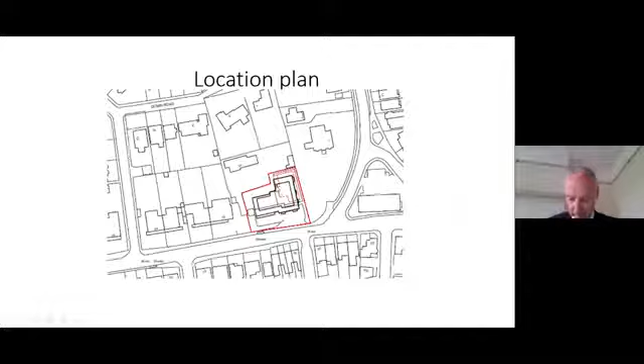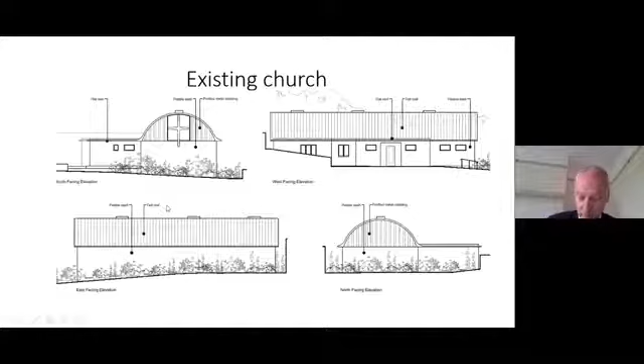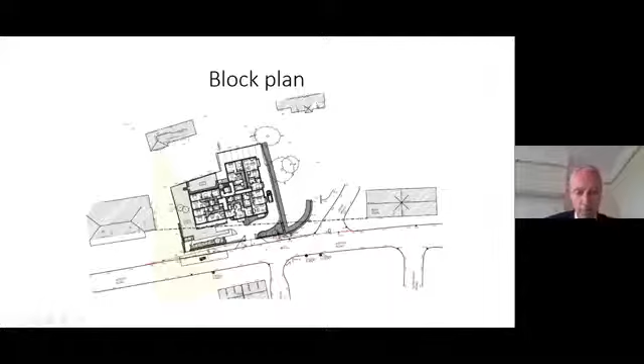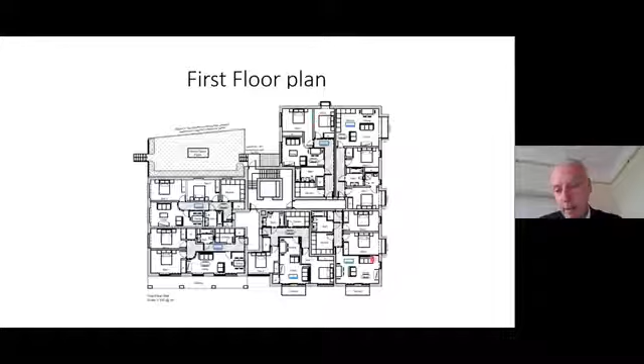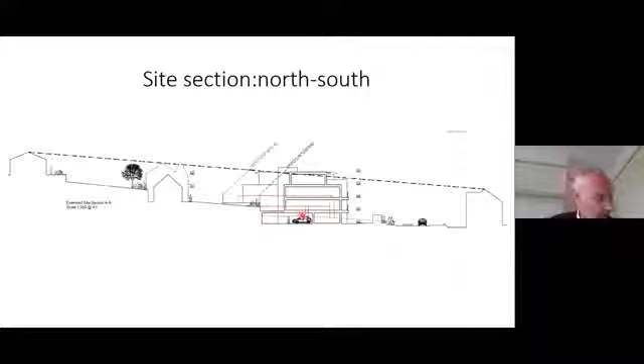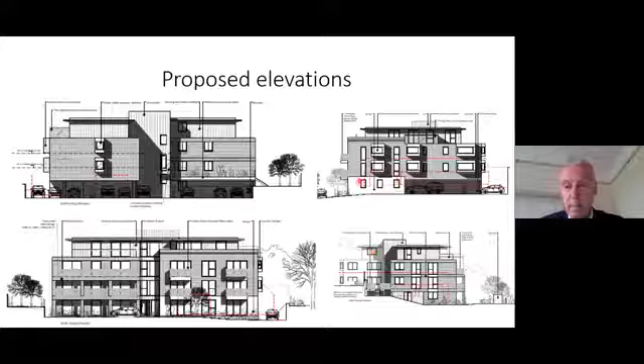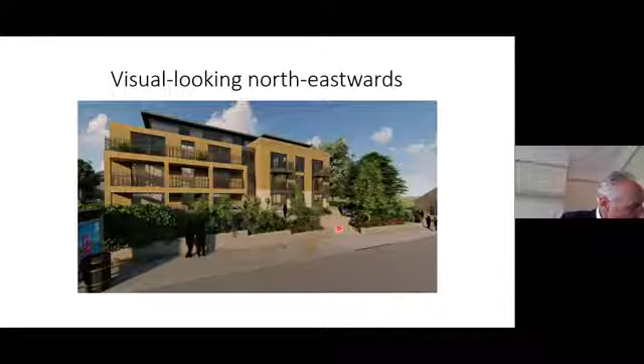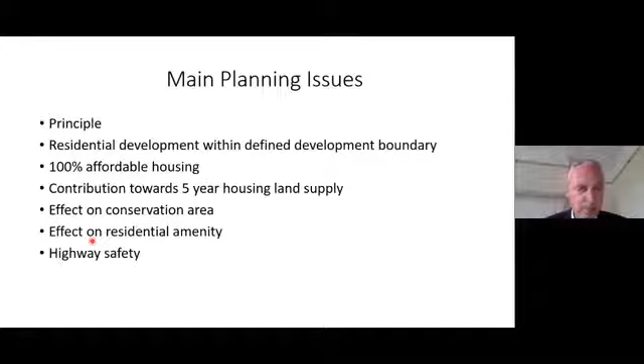So moving on to my recommendation, I'm recommending you delegate approval subject to conditions and to a Section 106 to ensure the units are used for affordable housing.

So the conditions, fairly standard type to start with, and then wall and roof materials - obviously it's important we get wall materials that are a particularly good match, similar to the Victorian villas on the west side. Window details, surface water drainage scheme - that would be underground cellular storage, approved by our flood risk management officer. Floor level details are important to make sure we get the building set at the right level so that it integrates properly into the street scene.

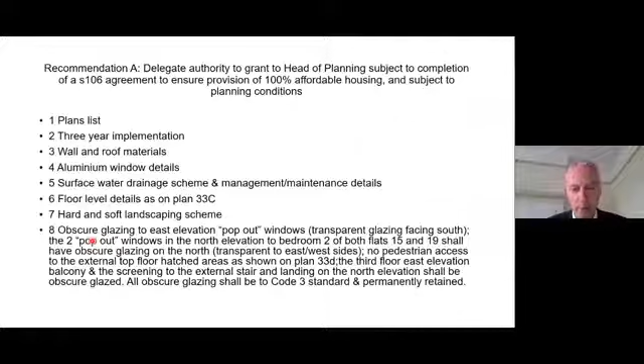Hard and soft landscaping details would be good to address. I also specified, in some detail, conditions around the pop-out windows on the north elevation and the east elevation, and safeguarding areas on the top floor so there can't be outdoor balconies which would overlook neighbouring properties from the north or west side.

A biodiversity mitigation plan has been agreed. I would also recommend a condition for a charging scheme to ensure we have the facility to plug in ultra low emission vehicles, means of enclosure details to the boundaries, access crossing details, the highways conditions, parking and turning, and no surface water draining onto the highway.

Recommendation B is just to ensure that, if permission was delegated, Chairman, the Section 106 is moved on in a timely manner. So to conclude, I would recommend that you delegate authority to approve, subject to the 106 and the conditions as set out, Chairman. Thank you.

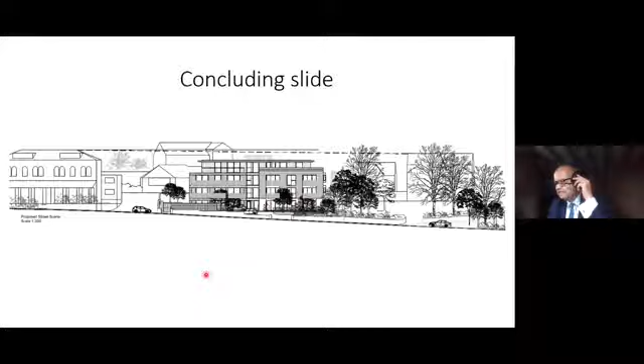I have no objection to the proposed development in principle. However, there are two points which I would ask the committee to consider. Firstly, the overall design is completely unsympathetic with the surrounding area. Surely a design that blends with the surroundings is all part of the conservation requirements in a conservation area. Secondly, the size is much too large and will dominate the area and be an eyesore if allowed as proposed.

The next is from Peter and Elizabeth Hillary. We reside directly to the rear of St Nicholas Church. Our garden area is to the front and sides of our property. We have no rear garden. The proposed new build will be directly in front of our property and directly in front of our garden. The height and extent of the proposed new build will therefore create a loss of privacy, a loss of light, and a serious loss of value to our property.

The next is from Kate Inkster. Further to my letter of objection already submitted when the proposal was first revealed, I wish to underline my concerns. The site is going to be overdeveloped. 18 two-bedroom units is too much for this area. Look at the density of existing housing nearby. There are no gardens or shared outdoor space, or nearby parks or playgrounds, which make these units quite unsuitable for families with children. The facade of the block of flats looks like an office block and not a residential unit. It needs to blend in with the existing houses and premises within the street line and area. The building is too high, 4 stories. It will not blend in with the height of the surrounding buildings, despite clever drawings to mitigate this within the plans.

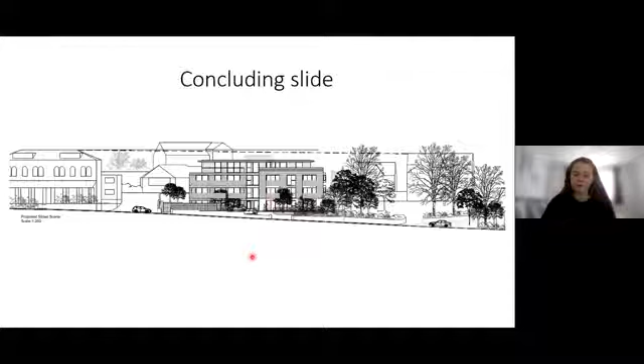Okay, thank you very much, Chelsea. In the normal way, we will now hear from Mr. Burden, the case officer. Mr. Burden, I invite you to respond on any points of clarification arising from public participation in the form of the reading out of those letters, and then I will ask Mr. Colin Graham, the highways officer, for any comments that he has in response to points raised in those letters. So, Mr. Burden. Thank you, Chairman.

Just a matter of procedure. Is there any communication from the applicant, any letter from them at all in support of their application? Sometimes we get those. There isn't anything listed from the applicant or agent as part of today's business. I just thought I'd check, because quite often we do get that.

Right, yes, there's a few points I would just like to respond to, Chairman, thank you. A comment was made that residents feel the development is an overdevelopment of the site. What I would point out is that amenity space was a consideration that was mentioned, and indeed somebody thought there wasn't any amenity space with the scheme, but there is in fact over 200 square metres of communal amenity space provided, and that is consistent with our policy on communal amenity space for new build flats. Also, the car parking, 1 space per unit, is consistent with the Dorset Council guidelines on parking, and no doubt Colin Graham is available for a little bit more information on that if required.

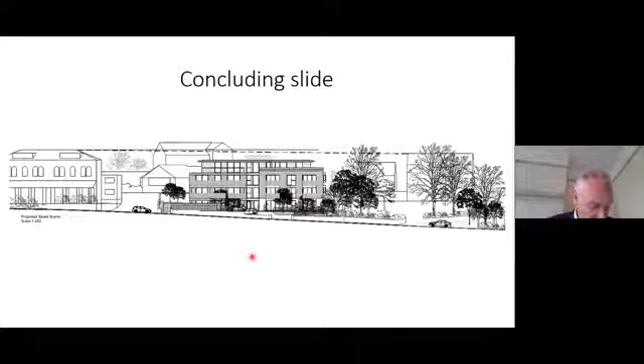Several people focused on the building line issue. Well, as I showed on the plan, I think it's broadly consistent with the front line of 18 to 20, the Victorian villas, so I think that's a fairly reasonable positioning of the building. Somebody mentioned the surface water drainage has not been addressed. Well, in fact, it has, because a report on drainage has been submitted to the flood risk management officer, who is happy with the principle of the cellular underground drainage scheme on the site and recommends conditions, and those are covered in my conditions, Chairman. Thank you.

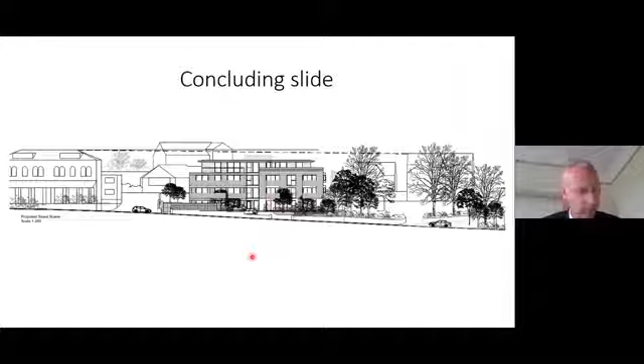Okay, thank you very much. So for the purposes of clarification, we're going to hear next from Colin Graham, because we've had lots of comments about highways, and then we're going to hear from the ward councillor Brian Heatley. So Mr. Graham, whilst things are fresh in your mind, do you have any comments in relation to highways from what you've heard? Good afternoon, Chair.

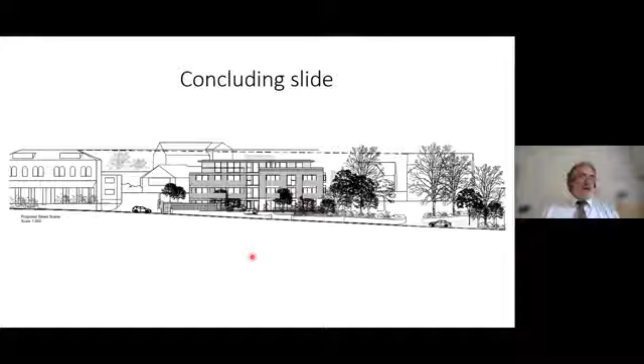Colin Graham, Dorset Council, Highways Liaison Officer. The main thing is the site. One has to take into account the existing extant use, which is for Class D1 for the church. Obviously, churches aren't just Sunday mornings, there can be multiple functions. I appreciate in recent years that might have been fairly quiet, which is why the site's now looking at being redeveloped. But it's there nevertheless.

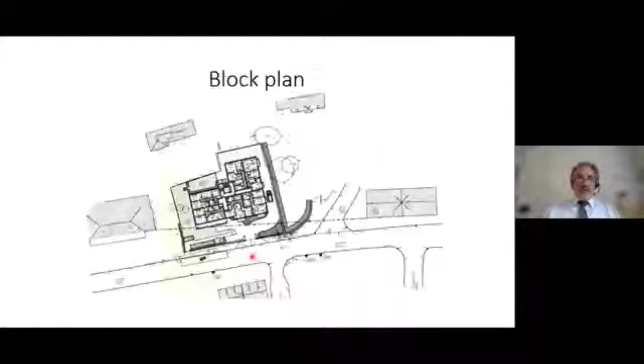It's going to be narrower, so that will constrain it and reduce the speeds down and tighten up the angle. It will mean that pedestrians have less conflict. The conflict zone, as we call it, is narrowed accordingly.

It's about 134 metres from the Rodwell Trail, which provides very good sustainable access both into the town and town centre for walking and cyclists, and also to the south to Portland and other places.

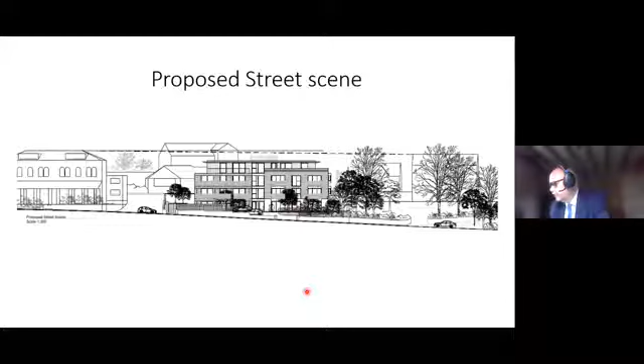Okay, I'll kick off. I'm on the same page as Brian, to be honest. There's not many opportunities we have for affordable housing, and despite some of the comments, this is for rent. They're not going to be turned into second homes.

I'm assuming that's not going to be possible because it's going to be run by a housing association or similar. I also noted that somebody said it wasn't very close to a cycle route. I cycle - the access to Rodwell Trail is just down by the bridge, only about 150 metres away. So I'm happy to support this, and if you're looking for a proposer, I'll be it.

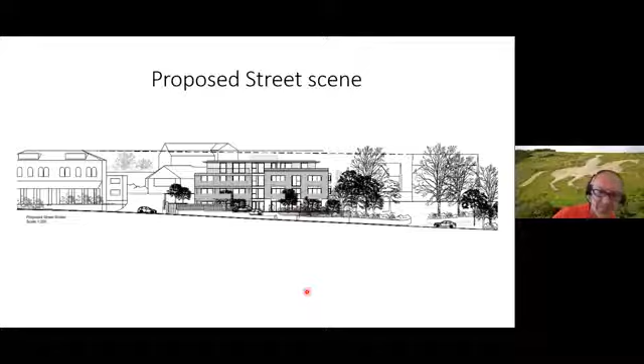Okay, thank you very much. Mr. Burden, do you have anything to add to that - the comments of the conservation officer, the fact that the properties are to rent?

Yeah, I mean, the fact that properties are for rent - it's a tenure in this situation that the housing enabling team leader is perfectly happy with. He's very supportive of the application.

In terms of the conservation area impact, obviously it does involve a subjective judgment. There's an understandable rationale for this - it respects the mass of existing buildings, but obviously introduces a modern contemporary approach. It is a building that has quite a lot of visual interest and articulation to the elevations, and I think with the use of a buff brick similar to that used in the Victorian villas to the west, that would be a really important visual link between the existing and proposed, Chairman.

Thank you. Okay, I'll certainly pick up on your comment about the brick. We've got a whole queue of people wishing to speak, and I'm going to start with Councillor Kate Weller.

Thank you, Chairman. Good afternoon, Kate. Good afternoon. Some of the public letters were saying that it was out of keeping, and what a shame it wasn't more like the development down at the bottom of Boot Hill. I have to say personally, I'm jolly glad it's not a pastiche toy town like the bottom of Boot Hill.

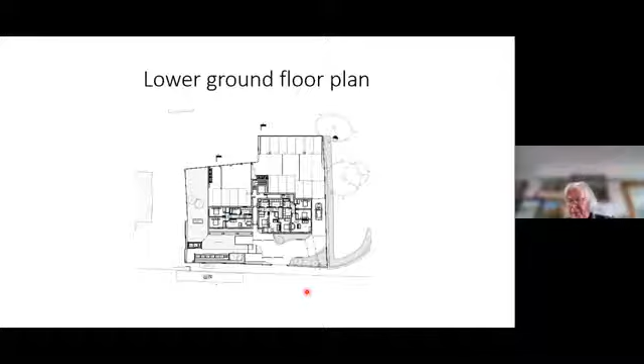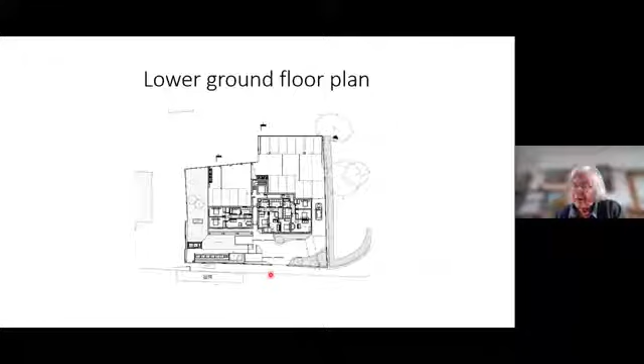On looking at the plans, I thought that the entry to the block of flats off the road may be too small. It looked to me as though it was only suitable for one car at a time. I'm not sure that that is correct.

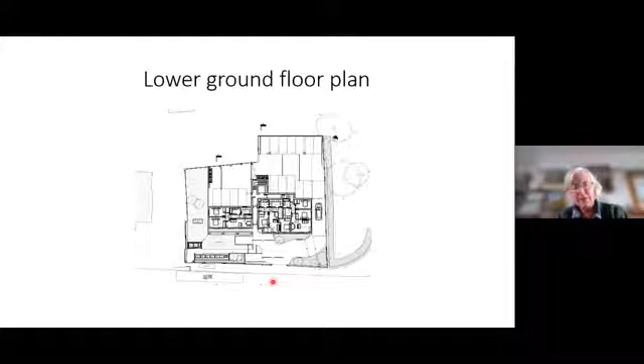It may be my impression, and I'd like some clarification on that please. On amenity space - we have a plot of land, a big building on it, a big footprint. We don't have a lot of amenity space, and I presume with 18 flats, 2 bedrooms, we are going to have a number of families with children. We all know what it's been like during COVID-19, with people not being able to get out, or getting out and not having anywhere to sit. So I do think it's very important for the residents of these flats to have somewhere to sit if they want to, and I'm particularly concerned about the children.

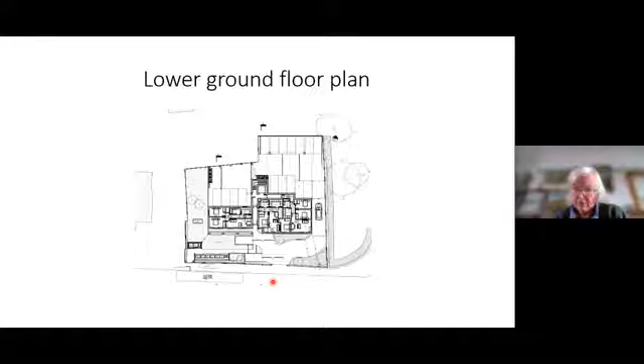So, Mr. Graham, picking up on the points raised by Councillor Dunseith. I just scaled quickly off the plan, as best I could off my screen, and it seems to be about the length of a car parking bay for the width of the access. It may be that historically, when it was negotiated and looked at, it was 4.5 metres. Our standard nowadays is 5 metres for simultaneous access and egress. I would defer to the planning case officer to check up on that. 4.5 metres, Chairman, the width of the access point.

Chairman, it sounds as though it's a little bit small then. Mr. Graham? 4.5 was our old standard until fairly recently, so it could benefit from being half a metre wider. Yes, I'll have to accept that. And could we get that change made then, please?

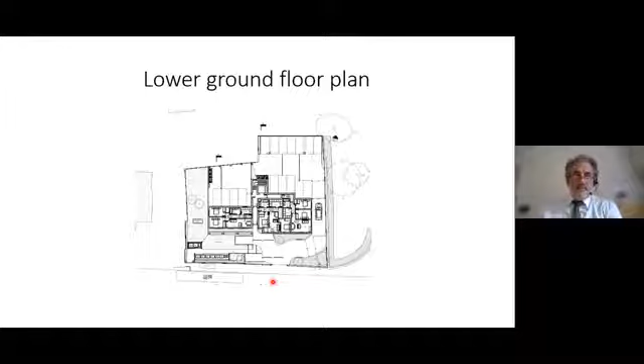Chairman, can I come in? Mr. Burden? Yeah, Chairman, I'm sure we could negotiate a slight amendment as part of a delegation to achieve a vehicular access modification to increase it from 4.5 to 5. Thank you very much. Okay, thank you, Councillor Dunseith.

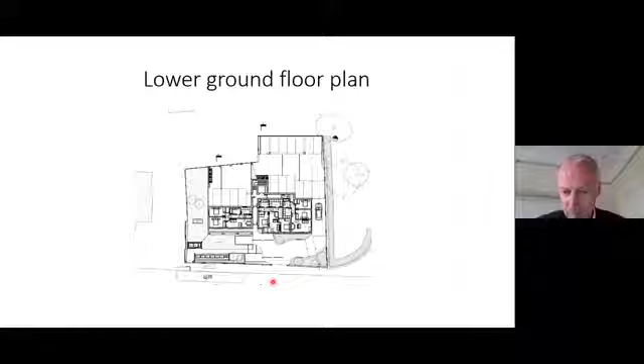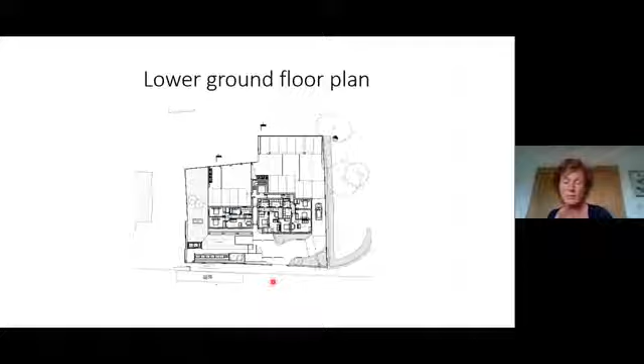Councillor Susan Cocking: I just wanted to say that I would be happy to second Councillor Ireland's approval of this application. It's housing that's desperately needed in Weymouth for local people, affordable housing, and like Kate Weller, I'm glad it's not like the designs at Boot Hill. Sorry for the designer, but as long as there is the condition that it's not for holiday homes, not to be resold for a profit, and that it will be for rent as well, which I believe it is. So I think the design is fairly in keeping with the existing houses, and I think they've gone to a lot of trouble to make sure that is right. So I'm quite happy with it.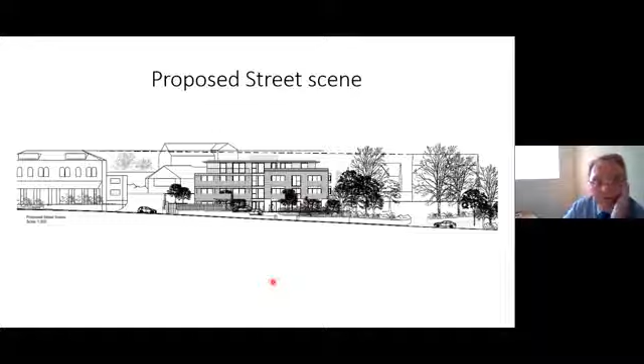Thank you, Councillor Shortell. Chair, so before Mr. Burden responds, if he would like to pick up on comments made by Councillor Shortell, can you also talk about the windows? You say the building sits nicely with the brick of the Victorian villas, but it does seem to have aluminium windows. Would you like to comment on both what I've said and what David Shortell has said?

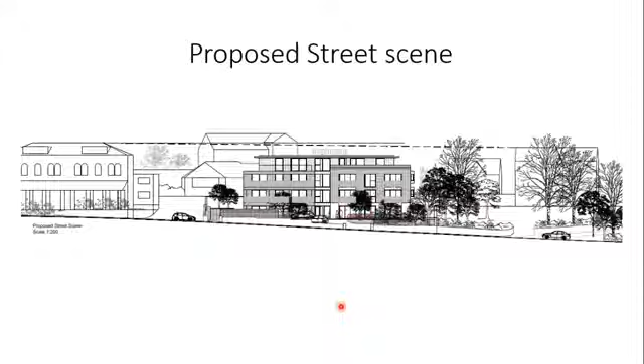Yes, Chairman. I think you're looking at a modern contemporary design, a crisp geometric design, and part of that would be the use of fairly modern materials - clearly a powder coated or similar aluminium window treatment would be very much commensurate with the aesthetic of the crisp lines we have to the building. That is something our conservation officer was keen to achieve, and it's something I would also support.

On the electricity substation, yes, you're right, there is a small substation currently on the site. That would be removed from the site. We did notify the electricity board on the application, but we didn't receive any comments back from them at all. But I understand from conversations with the applicant that all is well, and there isn't a problem with it being removed from this particular site, Chairman.

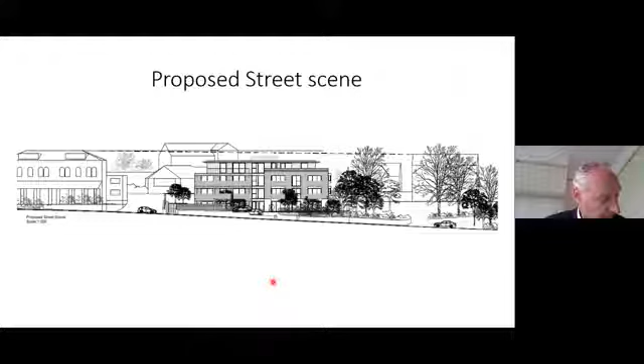I'm generally in favour of this application. I think Brian's eloquent sort of conflict between the need for the housing and the compromises made. There's no more to be said. I have one very minor point, Bob. Could you put up the plan that shows the pop-out windows, please, at the back?

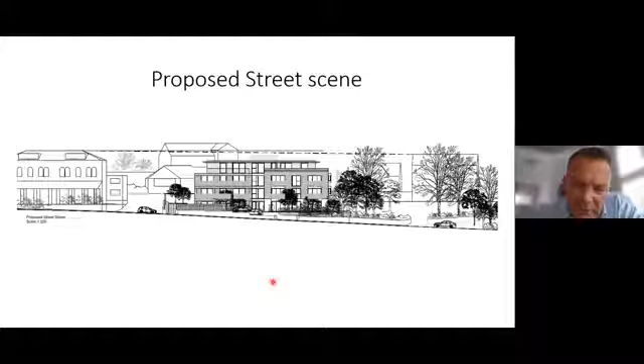My concern is that you talked about the pop-out windows, the front elevation facing north, being frosted to stop any intrusion to 16 Buxton Road. Yes, that's correct, is it? That applies to if you were standing in the garden of 16 Buxton Road, looking at the rear elevation of the proposed building. Are you looking at this elevation here?

Yep. Those two-bedroom windows, over the far end of number 16's garden, which is the secluded private end, those would be obscure glazed, north facing. So people in those bedrooms would not be able to look over the adjacent garden at the rear. They would only have views out of the slender side windows either side. So my question is, if they were stood looking westwards, they'd be looking straight at number 16, given the orientation of the window. I just wanted to ask the question.

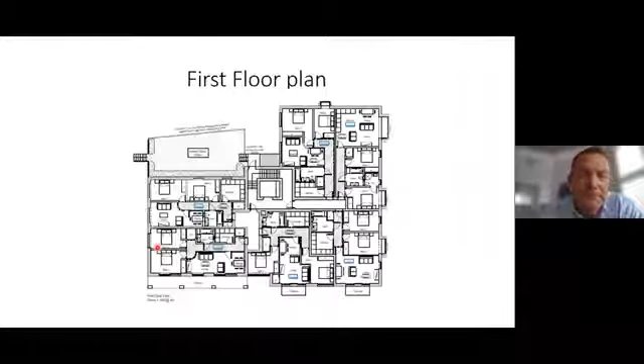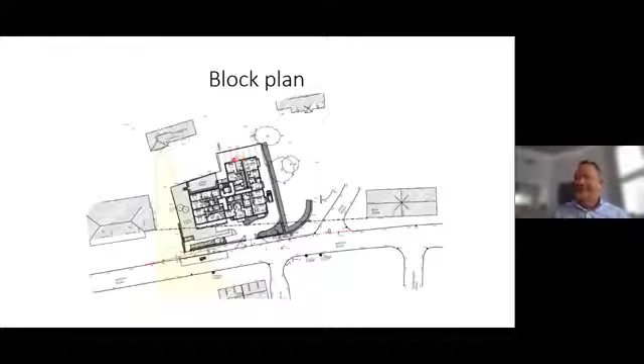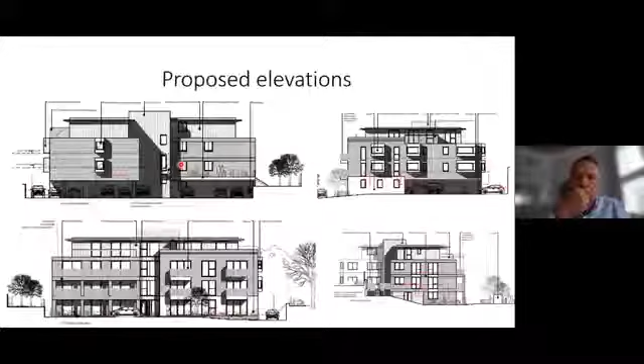Yeah, coming on to that point, you're right, if you look west you would look along there. You're right, you would look over the front section of 16 Buxton Road's garden. Now just to take you forward, so you would be looking over this bit of the garden. Okay. You find that acceptable, I guess, because you haven't specified.

I do in this particular situation because there's a subjective judgment to be made, and I made that with the benefit of having actually physically been on site and had conversations with the owner of the bungalow. I felt in my judgment that it would involve very little overlooking that could be a problem, to be honest, because I appreciate how important this area beyond these trees is, effectively the back garden of the property, because it hasn't got one at the back. So that was the approach I took. I rationalised that effectively this is sort of like the front garden, and quite often people look over your front garden in real life. But in this case, I took an approach of considering where the key most important quality amenity space was, and that's the judgment I made, Chairman.

Then I'll trust your judgment. Thank you. Thank you very much, both.

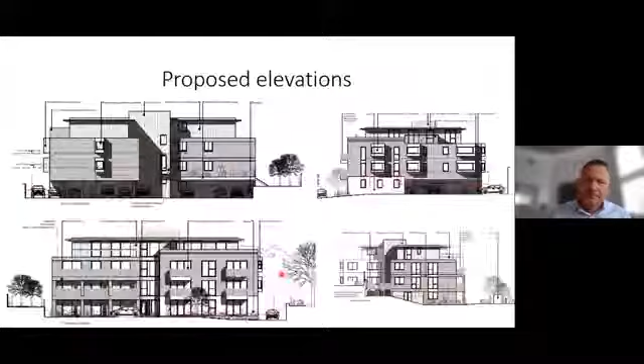So we have a proposal for approval from Councillor Nick Ireland, seconded by Councillor Susan Cocking. So we will now move to the vote. Chair, it's Ann Collins. Just to be clear, in terms of that proposal and second, is it in respect of delegating authority subject to the completion of Section 106 and the amended plan? Yes, there will be the necessary delegations, and the amended plan regarding the width of the access to be increased to 5 metres, to respect the width of the highway. Yeah, the access point to be clarified. Yes, the access increased from 4.5 to 5 metres width, Chairman. Indeed, thank you Chair, I just wanted to be clear. So, subject to those delegations, I'm now going to call upon Peter Barrow.

Peter, are you in favour? I'm in favour. Councillor Kelvin Clayton? Yeah, I'm happy to support that, Chair. For the formality, Susan Cocking? In favour. Councillor Jean Dunseith? Support, Chairman. Councillor David Gray, Vice Chairman? Support. Councillor Nick Ireland, for the formality? In favour. For the record, Councillor Louis O'Leary has sent his apologies today. Councillor David Shortell? Thank you, Chairman, happy to support. Councillor Sarah Williams? In favour. And Councillor Kate Weller? In favour. And for the record, I'm also in favour.

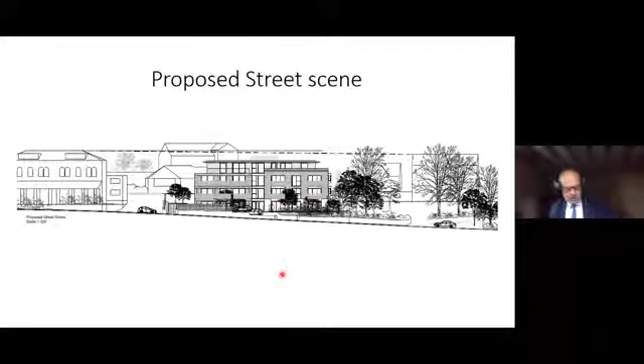Also regarding future meetings, there may be fewer letters read out in accordance with a new protocol, and you will receive details of that. Clearly, when virtual meetings were envisaged, it wasn't anticipated we would receive quite so many letters. You will receive details in due course.